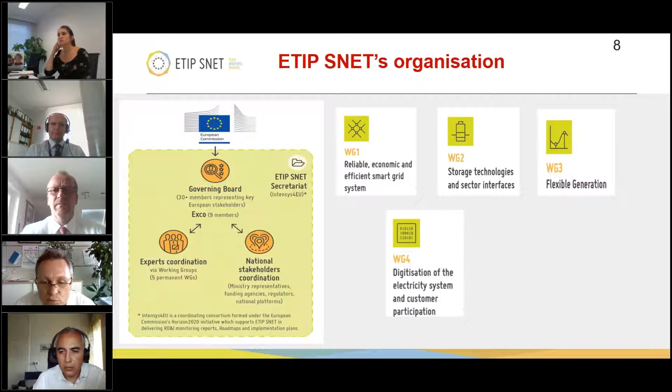So these are the 5 groups: dealing with storage technologies, dealing with the grid as such, dealing with flexible generation - this is our working group 3 - but last not least, also important, digitalization and how innovation is implemented in the business environment.

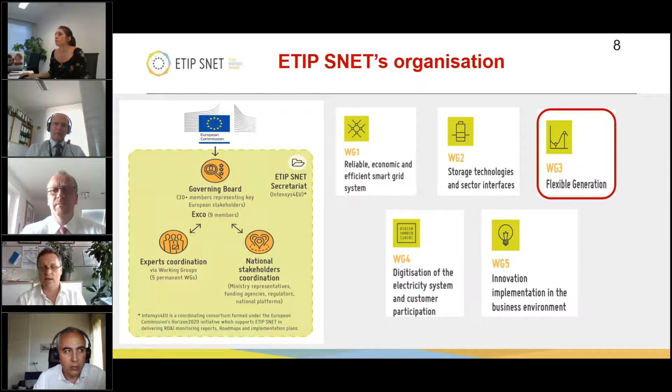So all today's speakers are members of the flexible generation group.

The basis of our work is written in a Vision 2050, which was established a few years ago and published in July 2018. You see also the download links here.

And recently, Working Group 3 published a white paper on how flexible power generation in a decarbonized Europe can work together with the whole system. Last not least, every 2 years the so-called implementation plan is updated, and recently the implementation plan 21 to 24 was published, where the specific research and innovation activities are listed and described.

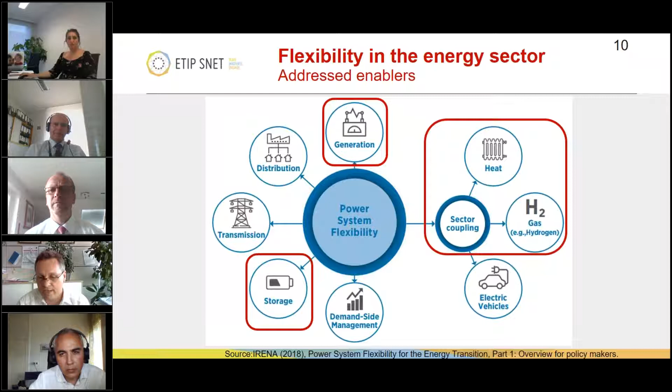Flexibilization of the energy sector. What does this mean? If you look on the power system only, it's quite clear that generation and the flexibility of the generation system plays a major role, but it's also about storage and what storage has to play in the system. And energy is not only about power, but sector coupling will more and more play a major role when it comes to power to heat, power to gas, and so on. We will hear about these issues also today.

So where are we today in Europe? Let's have a look on the world first, and we come now to electricity. If you have a look on the stated policy scenario of the IEA, this reflects the impact of the existing policy framework and also already announced policy intentions. There, in the global electricity generation mix, we find around one quarter renewables. This will increase to 37 and 44% by 2040. What does this mean? This stated policy scenario, and we are on this track today, is neither sustainable nor able to fulfill the Paris climate targets.

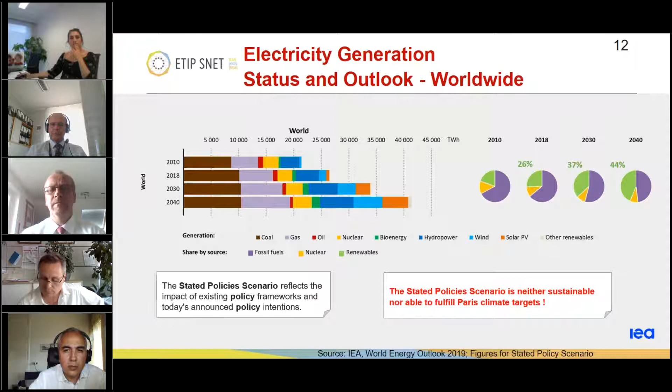So what about Europe? If you look on Europe, you find a different picture. First, you will see we have a higher share of renewables already. We had a decrease in electricity generation, which is good, meaning efficiency is increasing, but you see also by 2030 and 2040, electricity generation will increase. Why? We will hear about later. One third renewables, more than half renewables, and two thirds renewables by 2040. Looks nice, but even in Europe, this scenario would not be enough. We have to enhance and we have to speed up. This is not ambitious enough.

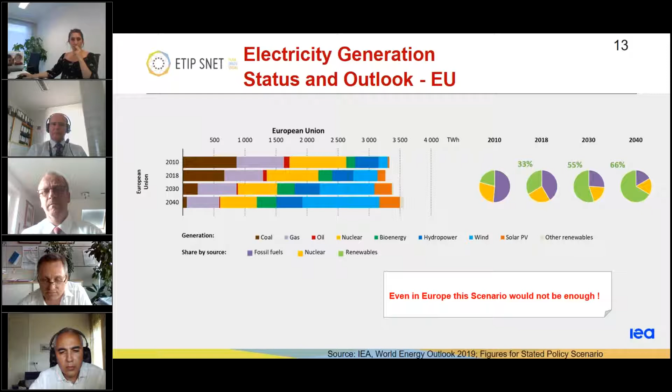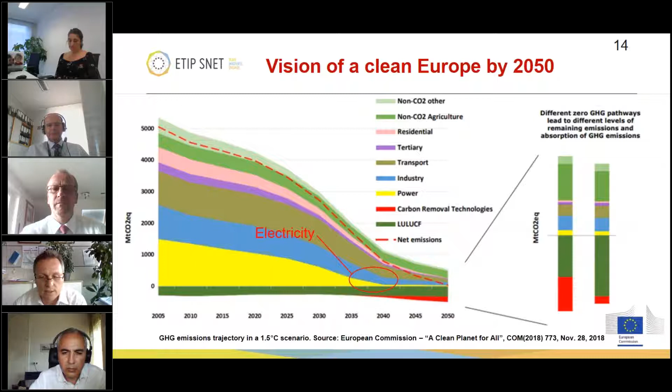So this was power, electricity only, but the target is to reduce the overall greenhouse gas emissions, the net emissions, to zero by 2050. Only the yellow is electricity. All the other reductions have to come from other sectors, and you find even negative emissions. These will come from carbon removal technologies, carbon capture and storage, carbon capture and utilization, and also, and this is the green, from land use change and forestry. These are carbon sinks.

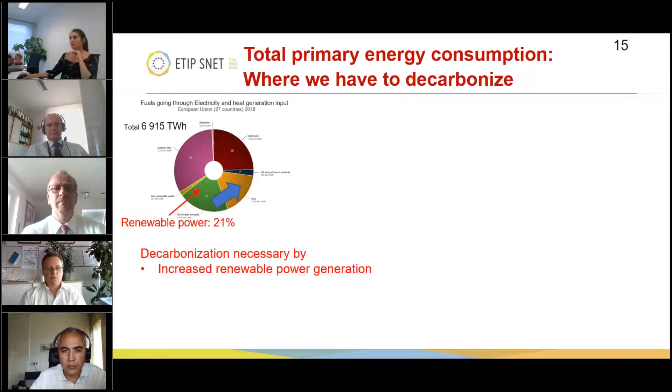Back to energy. Where do we have to decarbonize? If you look on today's electricity mix in the EU, you find around 21% only from renewables. Decarbonization means we need first an increase of renewables in the power generation mix. But if you look where the primary energy goes, you see also only 25% of the total energy consumption today is in form of electricity. And if you see transportation, even more than 90% is fossils. Also in the industry, half is from fossils. This means we need electrification. Therefore, in future in Europe, we will have more electricity generation than today. Society has to be electrified, and the fossil fuels have to be substituted by synthetic fuels, biofuels, hydrogen in all sectors. We will hear about this later on.

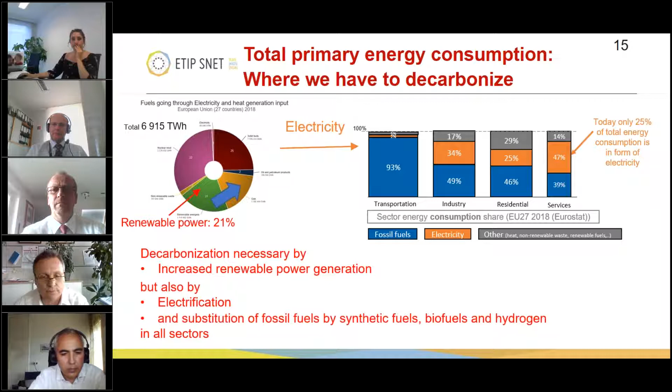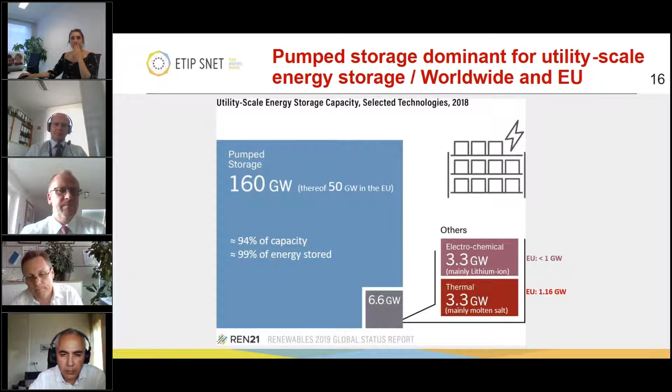So that's for the moment from my side. If there are any questions, we would try to answer them now. The one or other will be, of course, answered also later on. Thank you.

Yeah, so thank you, Peter. I see here a question: is the use of hydrogen in fuel cells also considered as electrification? It's done by Louise Gilles. So I'm not sure whether I got it. I got your question acoustically. Yes, the question is: the use of hydrogen in fuel cells, is that also considered as electrification?

No, first of all, the hydrogen has to be produced. I don't see the hydrogen in this case as a primary energy carrier, but perhaps you have other views on that, Georgios and Christian. We will hear, I think, later about hydrogen use, and for me it's a matter of definition if that is electrification, because the primary energy in future will be anyhow green electricity. That means the hydrogen produced and afterwards burned for electricity generation shall be seen as an intermediate energy carrier, but no more as a primary energy.

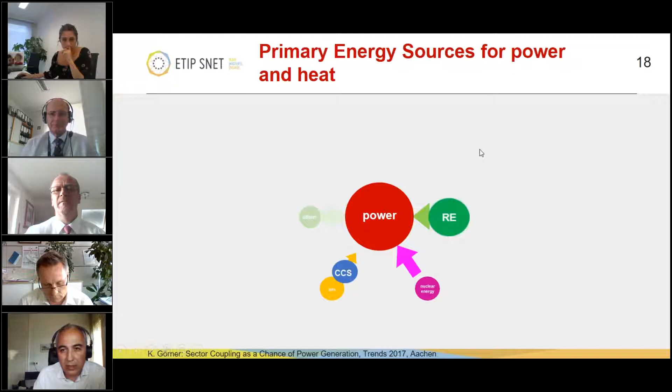Taking the floor from Peter who explained the current situation, we saw that, especially regarding electricity generation, the current situation in Europe is bound to change drastically. Everyone's talking about energy transition. Based on the evolving EU policy framework, we do expect first of all a gradual phase out of the coal power plants and a significant reduction in the shares of natural gas and nuclear energy. At the same time, of course, we expect a significant increase in renewable energy generation.

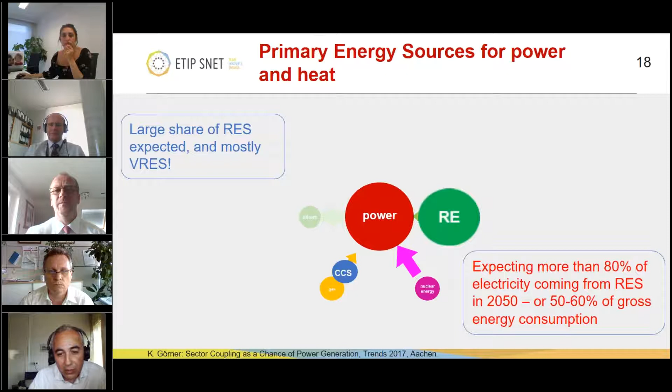This means that most probably we are talking about variable renewables, especially PV and wind energy. All the above are enhanced by the policy targets, both of the EU for 2030 and the long-term strategy for 2050 to become climate neutral or to have net zero emissions. And we do expect more than 80% of electricity coming from renewables in 2050.

Which are the primary energy sources for power and heat for the future? How will we cover the energy demand then? One obvious answer is that we can do that partly with the increased deployment of wind and PV generation, with high potential for large-scale deployment at terawatt scale of power. For example, notable examples are rooftop PVs and offshore wind energy. But again, at the same time, they are variable and intermittent, and we have even today difficulties to have accurate generation forecasts over time.

Then we expect biomass to play a role as well, with its main advantage being its excellent storability. But there are well-known issues about its limited resources.

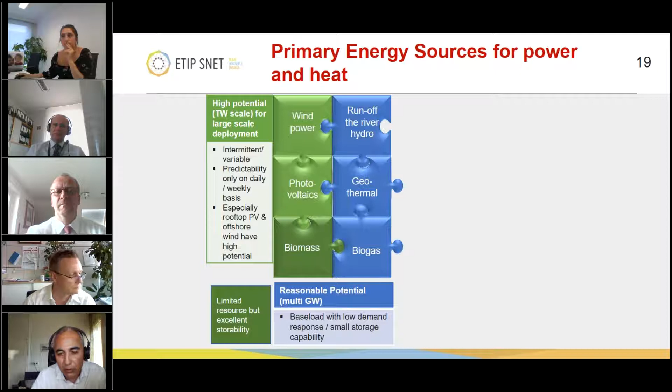Moving on with another category with significant generation potential in the scale of multiple gigawatts, in this category we have put run-of-river hydro plants, geothermal, and biogas plants. All these can cover part of the base load, but with limited storage capabilities.

On the other hand, if storage capability is considered, the main technologies or sources with reasonable potential - even up to terawatt hours of energy scale of generating energy - are hydro dams or reservoirs, pumped hydro, and solar thermal. These are the main technologies capable of providing storage capacities at very large scale, but they have geology and geography restrictions. This means it's not for everyone - it may be site-specific.

Then nuclear, and up to a point very limited coal and gas plants, will still be here, though especially nuclear power plants only in certain countries and significantly reduced. Finally, other technologies like wave or tidal power are again largely regional and not really mature yet, having to overcome also environmental restrictions, while waste-to-energy power generation must run continuously and also face some strict environmental permit procedures.

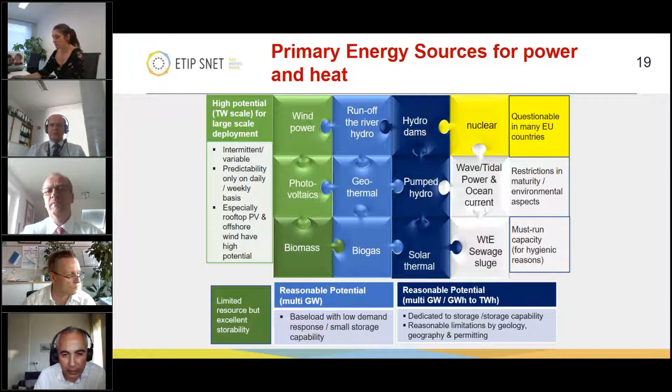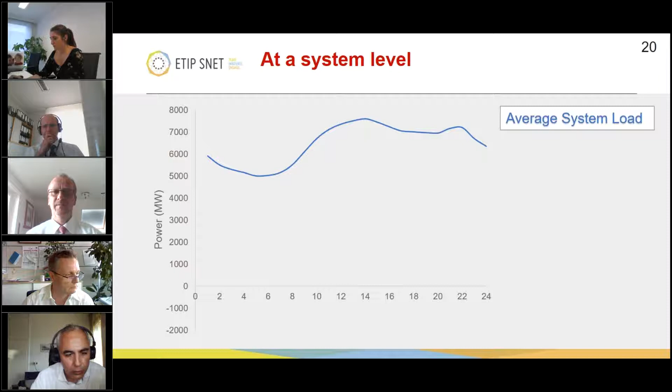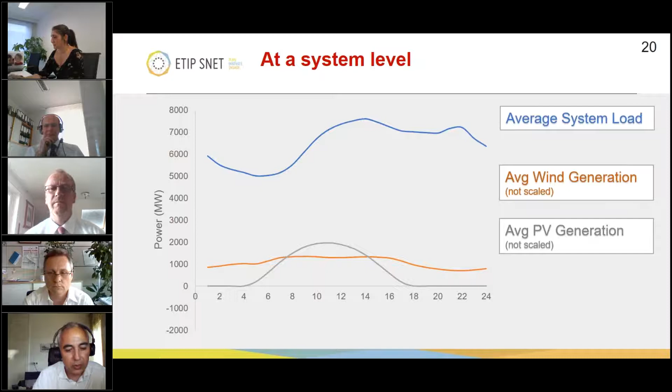Let's remember how a high percentage of variable renewables is changing the average system load of an electricity system. Taking the example of Greece, this is the average system load of last August 2019. If we subtract the average wind generation and average PV generation of that month from this load, it won't be so smooth across different days, but subtracting these two profiles from the average system load gives us the so-called residual load, which should be covered by other dispatchable generation plants, since PV and wind are not dispatchable by themselves.

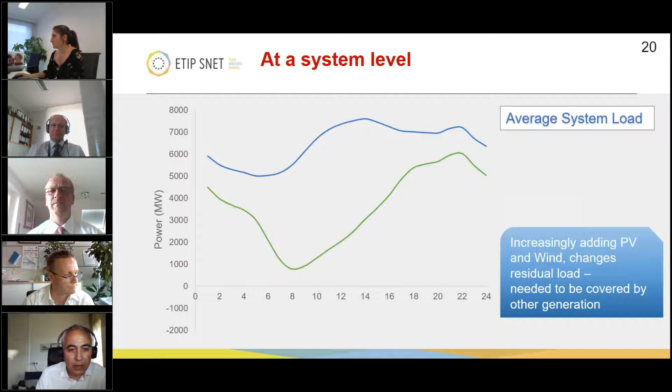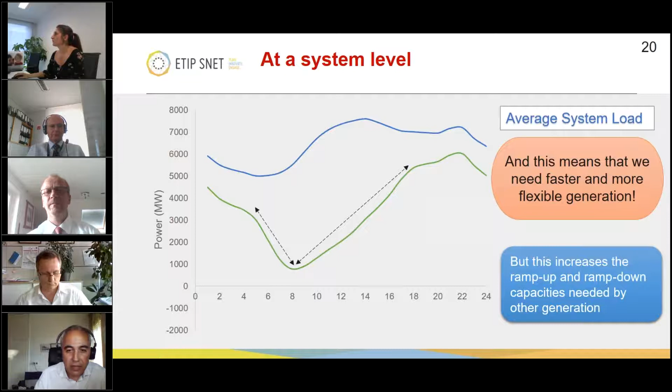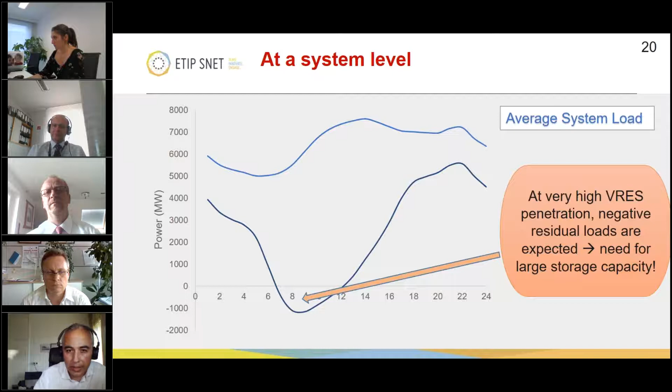Since we expect a very high increase of variable renewables, the profile of residual load needed from the rest of generation changes drastically. As we add more, the rest of generation needs to be taken on and off more rapidly, increasing needed ramp up and ramp down rates. At the same time, base load is considerably reduced, meaning must-run or non-flexible plants will be more difficult for the system operator to manage. Even at very high VRES penetration, we can expect negative residual loads, meaning we either curtail renewable generation or need large storage capacity. This is the well-known duck curve.

This brings us to a question largely related to our working group 3's field: what flexibility needs do we expect in Europe in the following period? The TSO Association in Europe, ENTSO-E, publishes a regular report called MAF, the Midterm Adequacy Forecast. They estimated the flexibility needs of European power systems in 2025 in terms of peak upward and downward ramps. This figure shows the hourly residual load ramps, meaning hourly changes in load minus variable renewable generation, requested from dispatchable generation units, considering each market node, or country, independently.

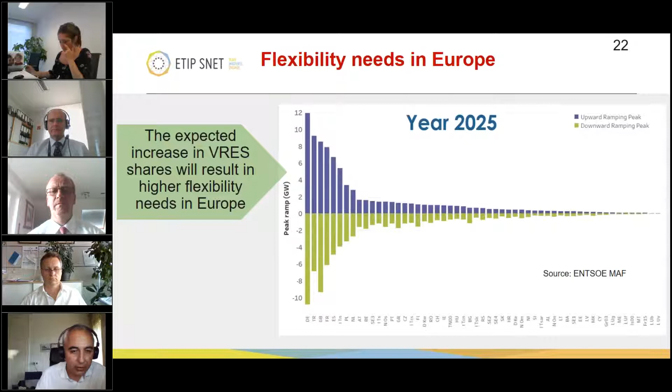Since we're discussing flexibility, it's important to clearly define two aspects. First, operational flexibility refers to the capability of a generation plant to support the system fast and reliably, hence the word operational. This is what is implied in the previous slide when we refer to flexibility.

Our working group's white paper discusses these concepts extensively, and we've found that over the last decade, operational flexibility has improved for both thermal and hydro plants. Minimum loading of generation has been reduced, as well as starting times, while ramping capabilities have increased. Operational flexibility also implies capability for black start, the process of restoring a generation plant to operation without relying on the external electric power network, to recover from a total or partial shutdown. The main challenges are material stress and wear due to cycling, and increasing efficiency, especially under partial load.

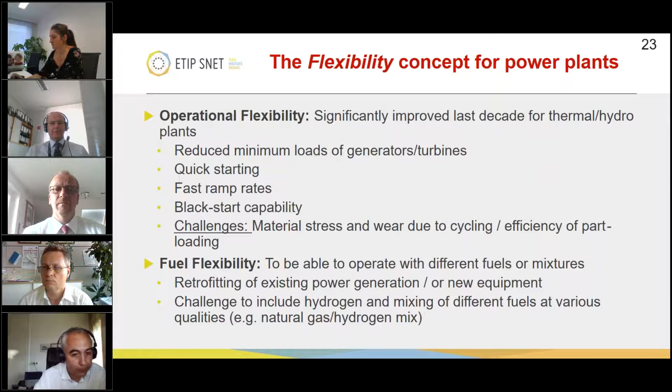We had a long discussion in our working group about the operational flexibility characteristics of power generation technologies, and we have come up with an adapted graph that you see here, categorizing several types of generation according to their flexibility characteristics.

This graph compares the main power generation technologies upon 3 flexibility characteristics: minimum load at the x-axis as percentage of full load, ramping rate capability in the y-axis, again as percentage of full load achieved per minute, and finally the hot startup time that is shown in the size of the bubble.

We can see, because there's a lot of information inside, that for example modern gas engine power plants operated especially in multi-units, possibly with fuel flexibility as well, have excellent flexibility characteristics, but again with relatively low efficiency, probably below 50%, while hydro, reservoir, and pump storage have very good flexibility characteristics with higher efficiency.

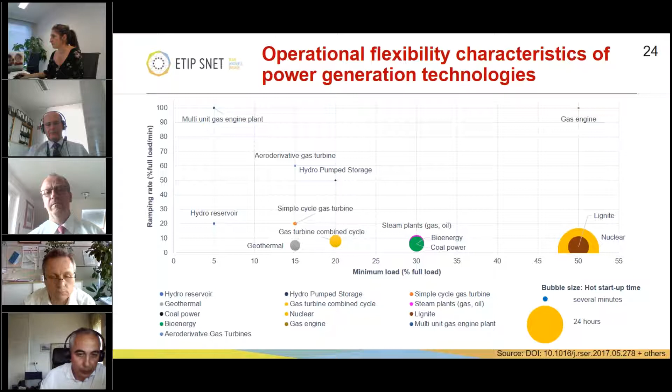In our recent white paper that you can download, you can find download links in the first slides of this presentation, we have evaluated in a qualitative manner the main energy sources with regard to their flexibility characteristics, both in terms of fuel flexibility and load or operational flexibility.

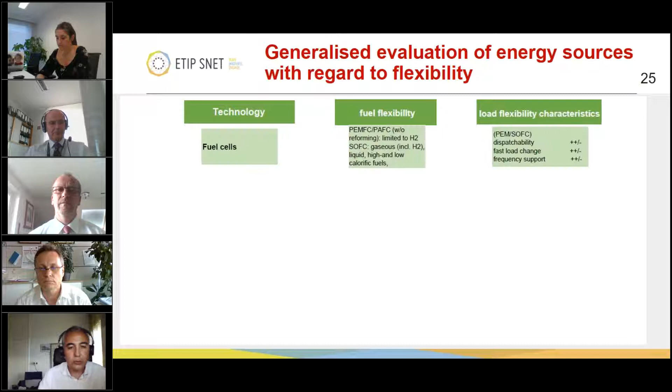Without going deep into details, you can see that, for example, regarding fuel cells, the PEM fuel cells have very good operational flexibility characteristics but limited fuel flexibility ones. On the other hand, SOFC have poor flexibility characteristics but higher fuel flexibility.

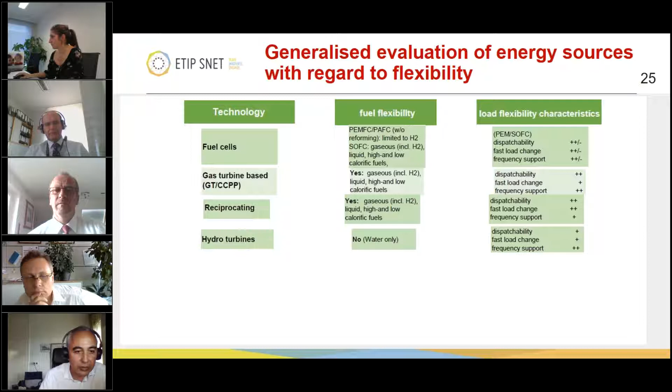Gas turbines and reciprocating engines both have good fuel and operational flexibility, while hydro turbines are characterized by good operational flexibility characteristics.

The thermal power plants can be fuel flexible, but in terms of load flexibility characteristics, they suffer, apart from the ability to provide frequency support.

Finally, as I said before, solar and wind energy are not flexible power sources, at least without being coupled with storage or other flexible generation units.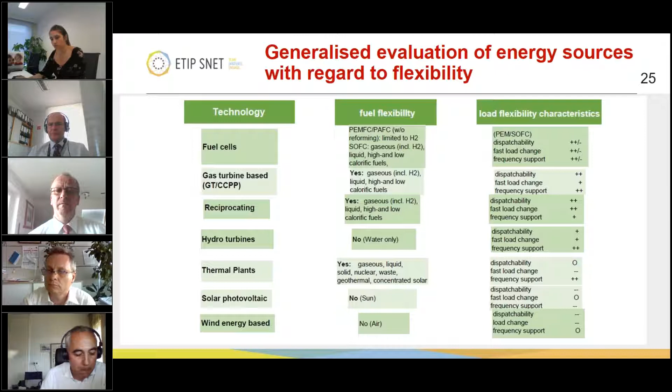This brings us to the connection with the next section that we are discussing about storage, and mainly I would say about long-term energy storage.

Apart from the fact that we do expect an increase in variable renewables, mainly PV and wind, we saw how this affects the system load and changes the residual load needed to be covered by other flexible generation. This situation is fueled as well by the fact that generally the produced power from wind and PV do not coincide with electricity demand. This is a well-known feature, but again plays an important role specifically for power systems.

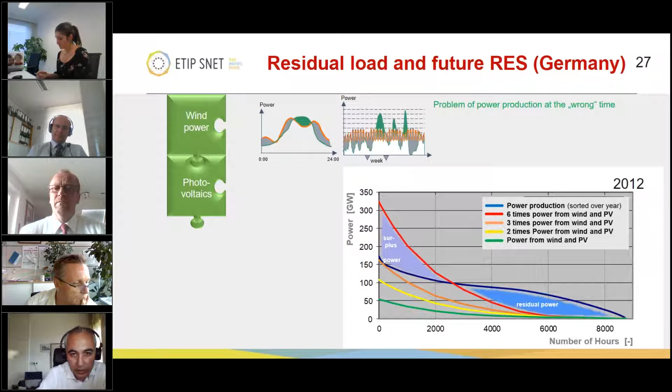On the other side, for another 5,000 to 6,000 hours of a year, we have a residual load that should be covered by flexible and dispatchable generation with characteristics like the one we saw before.

Now, if we can have, let's say, bulk energy storage options, we could potentially use it to shift part of the surplus power to cover the residual loads. This means that we need to think about how thousands of terawatt hours can be stored seasonally and then use it at a later stage when needed.

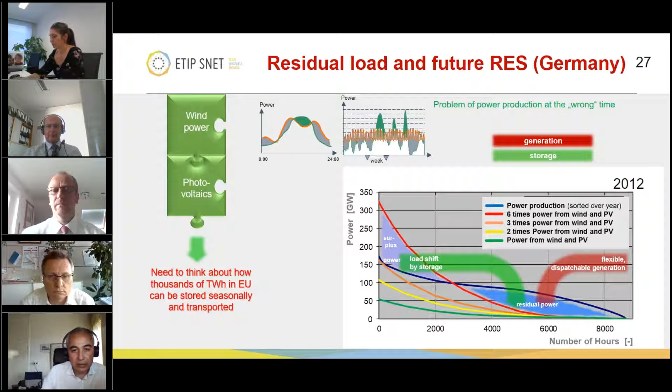Generally, storage can have multiple uses in a power system, and this depends on the power and energy capacities and the response time of each technology.

Storage can enhance the stability of the power system by providing high power outputs at short times. It can also smooth a variable renewable power generation profile during a day or parts of a day, providing the so-called capacity firming. On a daily basis, and providing sufficient energy capacity is available, storage can also help to shift loads at certain times of the day, filling valleys of the profile or reducing peaks.

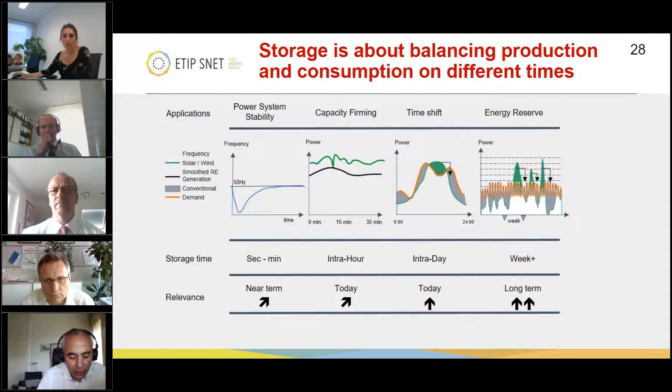As was explained previously, at long term, storage can act as an energy reserve, obviously as long as large storage capacities exist. We will not go deeper into the effects of storage into power systems, as this was dealt with by Working Group 2 and the webinar of last week.

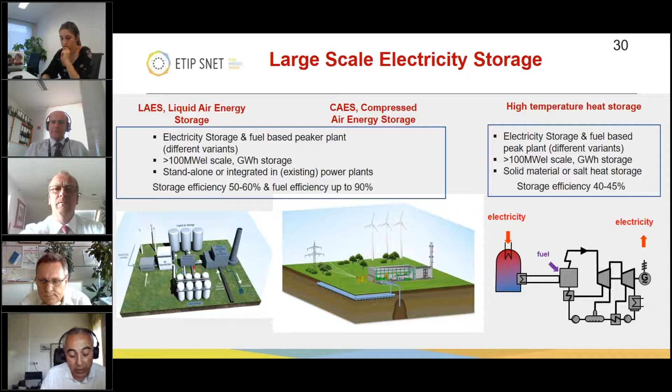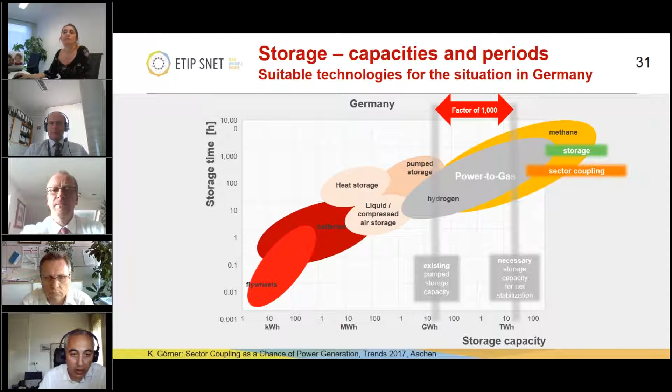So, for example, we could use the high amount of excess energy to produce fuels for the transport industry, to transform it into heat for the heat networks, into gas for the gas networks, and so on.

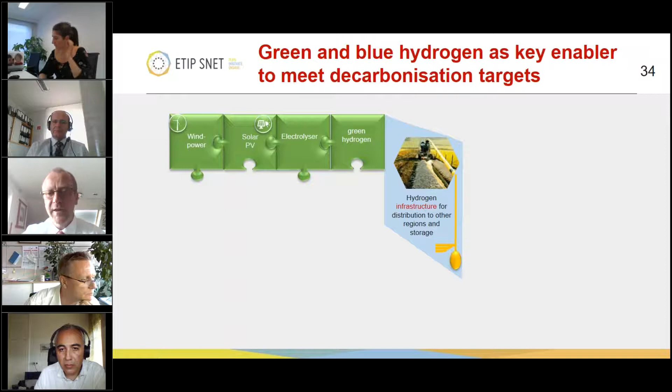And of course, with hydrogen, we also need the infrastructure. That means we need transportation, either mixing with natural gas or in future pure hydrogen pipelines, including storage in caverns. And if the hydrogen is distributed, we can use it either directly for fuel cell cars, trains, or in reconversion into power and heat. We can, of course, also go into more valuable synthetic fuels, which drive aviation or shipping.

And that's the last point. Once we have caverns available, which are no longer used for natural gas storage, then also hydrogen can be stored on a seasonal basis. Seasonal means something between 1 to 6 months at the end of the day, depending on...

We all know that the build of new PV and wind will take 1 decade, 2 decades more before all sectors can be supplied with green hydrogen. So there is also a transition technology, which is blue hydrogen - taking natural gas, reforming it, producing hydrogen, capturing the carbon, which we expect to play a role, at least in those countries which have a chance to store CO2.

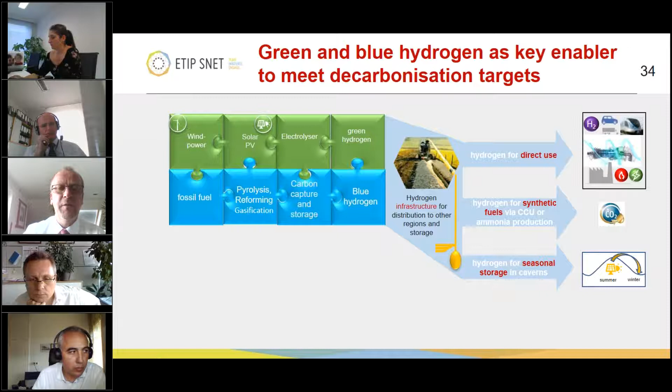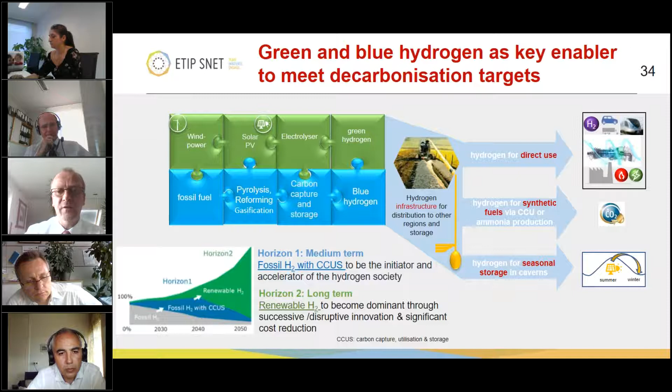That's mainly the North Sea countries like the Netherlands, UK, and Norway. And we expect that there will be a smooth transition depending on how fast renewables are added, how fast electrolyzer capacity can be built up - that in the beginning maybe bigger amounts of blue hydrogen are available, and that then after 2025, larger electrolyzer capacity driven by renewable electricity will serve these markets.

To go to the synthetic fuels, we have to consider also the need of carbon anyhow. If you want to go into synthetic kerosene for aviation or synthetic diesel or methanol for shipping, CO2 is needed. And also the chemical industry mostly relies on CO2. That means we need, if we go away from fossil natural gas or coal, recycled CO2 or biomass CO2 to produce chemicals and fuels.

In the UK and other places also, there is the idea to create negative emissions by capturing CO2 from biomass-fired power stations and storing the CO2, which will help other industries which have less chances to fully abate the use of fossil energies. And the technology itself, the capture and also the storage underground, is proven already in many regions in the world. What you see on the right-hand side is the world's largest carbon capture plant.

It is essentially a CO2 storage, but for enhanced oil recovery. So the CO2 is going underground, and on the other side of the well, more oil is recovered, but that doesn't matter. We see with 4,776 tons per day, the technology is mature enough.

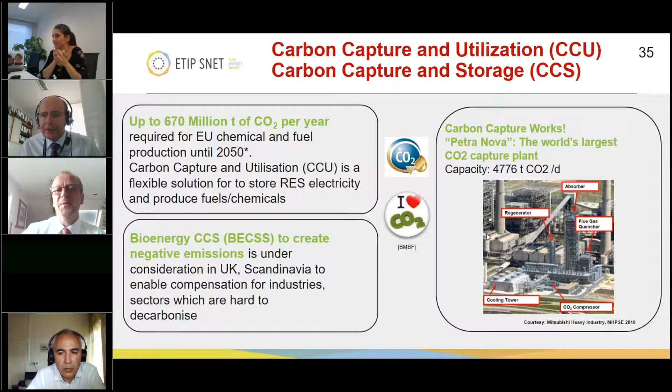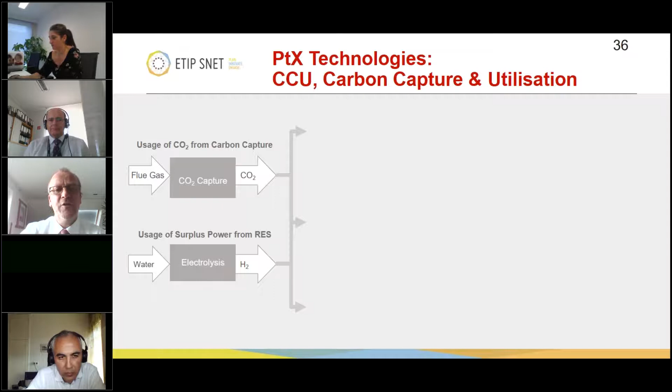So what uses do we consider, or does EU industry and research consider? On the one hand, of course, you always need the CO2 source and the hydrogen, and then you can go different pathways. One is the so-called power to gas. That's sometimes confusing because also people call power to hydrogen, power to gas.

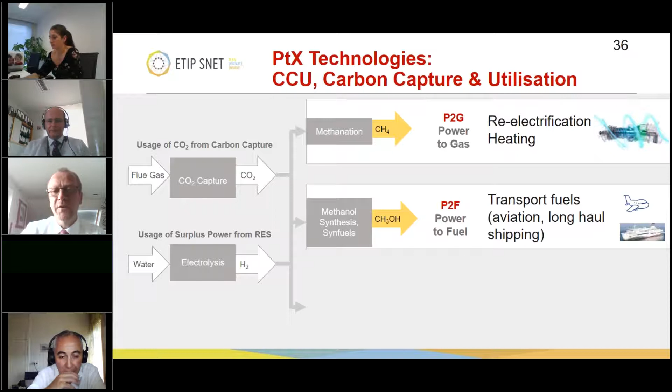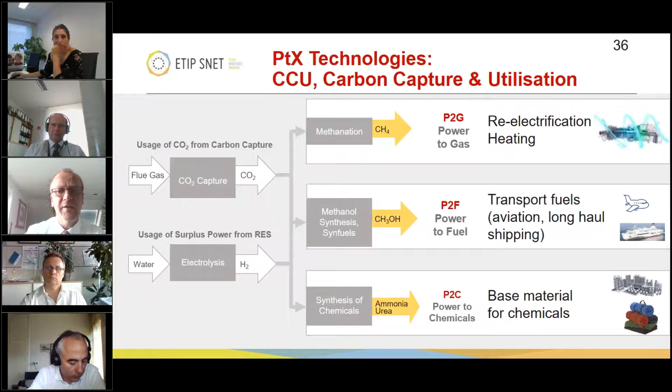Second thing is power to fuel, which can be in the beginning methanol, but from methanol you can go into diesel, kerosene, or other synthetic follow-up products of methanol. And then we have synthesis of chemicals like urea, where you first go to ammonia and you take CO2, and together you have then fertilizers produced, but also all plastics and so on can be produced based on hydrogen and CO2. It's just a different route of the chemical production line, starting with another form of CO2.

The technologies for reconversion of fuels, and it can be either hydrogen in future or today natural gas or liquid fuels, are well known. I just want to show the scales, what we are talking about at the moment. The largest fuel cells at the moment are in the megawatt range, but go down, of course, to the kilowatt range in cars. Gas engines are available to 10 megawatts, some 13 megawatt maximum size, and have efficiencies around 50%.

The combined cycle gas turbines, or gas turbine size, starts in the 1-2 digit megawatt scale, but they are mostly replaced nowadays by gas engines. But then these combined cycle plants go up to bigger than 800 megawatt electric and reach efficiencies there of 63%, maybe 65% in the next 5 years.

The fuel efficiency for all these technologies in combined heat and power units can be between 70 and 90%, depending on at what temperature level the heat is needed - so if it is high temperature heat for industry with steam, or if it is just a heating grid.

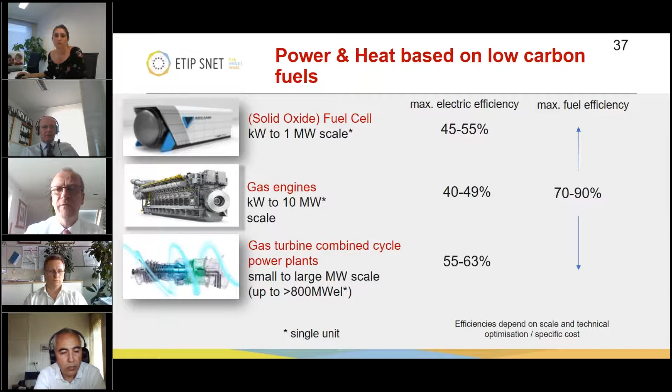Hydrogen is considered to replace all the fossil fuels used today in power generation, but also in power and heat applications in future. It can be directly burned in principle in gas engines, gas turbines, and fuel cells.

Ammonia, on the other hand, may be considered as a long distance transport molecule for the transport of hydrogen, for example from other regions of the world into Europe, because ammonia can be more easily liquefied than hydrogen. And the splitted ammonia, which is a mixture of hydrogen and nitrogen, can directly be burned in today's machines.

For the pure hydrogen combustion, another 5 to 10 years of development is needed, which is undertaken at the moment by industry. So about 30% can easily be co-combusted today, but for 100% combustion, this development time is needed to also keep all emission limits at the combustion, for example NOx in the combustion flue gas.

The first example of a hydrogen-fired turbine will be a retrofit, which is already on the way in the Netherlands, where Vattenfall announced with its partners Equinor and Gasunie to reduce CO2 emissions by 1.3 million tons per year in 2025, when an existing plant is retrofitted to 100% hydrogen combustion.

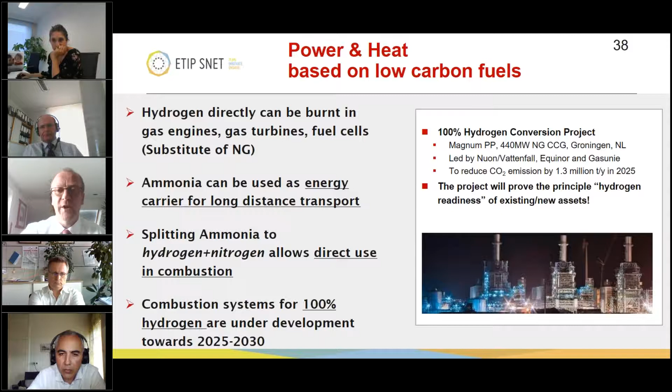But it's not only about hydrogen, and hydrogen is not the only solution. What is happening in the transition at the moment is that coal assets are replaced by new gas-fired investments.

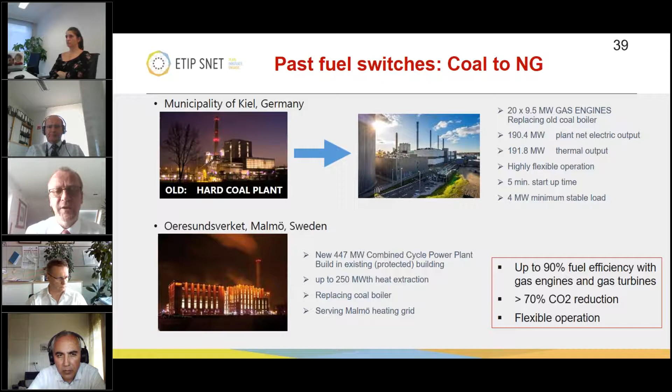As said before, these technologies offer 90% fuel efficiency, and when switching from hard coal to natural gas, also already 70% CO2 reduction, and quite flexible operation compared to the previous design.

But it's not only about flexible generation, because the CHP plants on the one hand are used to supply heat to heating grids. To make them more flexible, it's now state of the art to put gigawatt hour scale heat storage, like hot water storage, integrated in these power plants.

But the more renewables come into the electricity grid, the more the CHP plant also suffers from the inability to reach a reasonable income from the produced electricity. Therefore, more and more, especially in the German and Dutch context but also in UK, projects come up adding heat pumps and electric heating into such CHP plants to avoid the production of unwanted electricity in the heat supply. That means when there's a large excess of wind or PV power, then electric heating or large heat pumps will take over.

And heat pump technology at the moment is in the situation to make a big step into the 50 to 100 megawatt range. That means commercial scale industrial heat pumps being able to support both steam to industry, but also heat to heating grids.

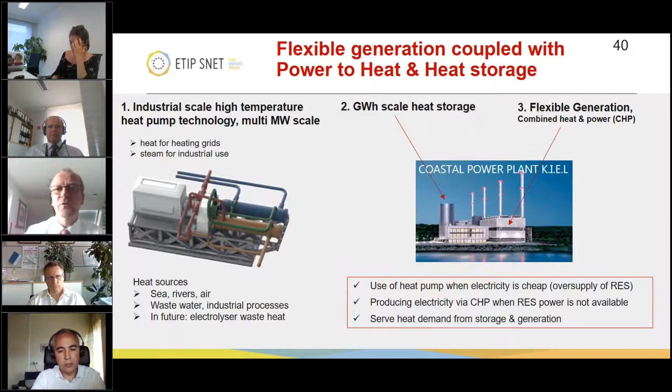In the past, retrofits already started 20 years ago to use existing coal-fired power plants, which are also mainly heating plants, like Avedøreværket in Copenhagen, converting from coal firing into biomass firing. The EU has just seen 3 gigawatt electric retrofits from coal-fired power plants into biomass firing over the last 20 years.

On the other hand, more and more every country in Europe looks at no longer having deposits for waste, but installing more and more waste incineration. Some countries are slow, but it's ongoing, and that is also somehow at least a low carbon source of energy, so better burning the waste than getting environmental problems from deposits. And at least 50% of this waste also is biomass.

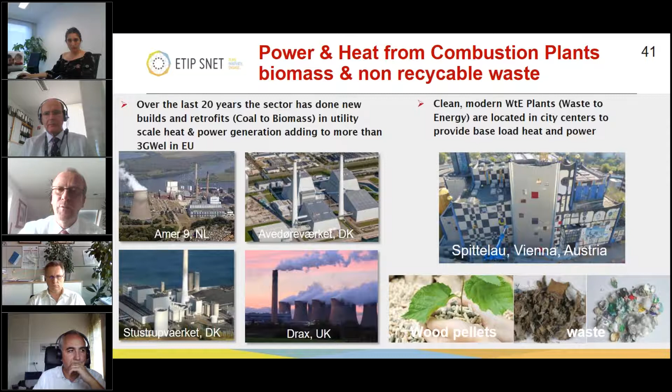And you see a protected building, an artist's design, being built in the middle of Vienna, because it is important, of course, for supporting the heat directly to the heating grids that these plants are not far outside of cities but in the middle. That also avoids long transportation of the waste.

So how can a decarbonized future look like?

The first thing ongoing today is optimization of all energy systems and implementation of energy efficiency technologies. It cannot be that we still have high temperature heat going through the stack in some industries at 400-500 degrees C. Organic Rankine cycle technology or other cycles for low temperature heat recovery are being implemented, but there's also a push needed from the policy side to support these projects which directly save CO2 emissions by using waste heat.

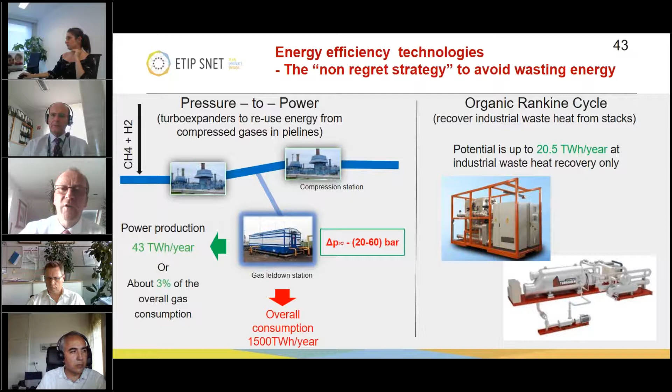One example is the gas grids in Europe, where often gas from high pressure—up to 200 bars, on average maybe 100 bars—is released to lower pressures without using the expansion energy. That means turbo expanders to use this compression energy in the gas grid should be implemented more and more. This is the low-hanging fruit and a no-regret strategy anyhow.

There is development of new thermodynamic cycles which allow more efficient cycles. That is, for my understanding, a 10-year exercise, to improve also the reliability and cost effectiveness of these technologies. You see on the right-hand side one example of such a pilot plant or small demonstration of a new cycle for using CO2 instead of water as the cycle medium.

We of course need to further improve the turbo machinery, not only for thermal power, but also for hydropower and wind turbines, because there's always efficiency which can be gained, and therefore it makes the whole value chain more competitive cost-wise. And we have to develop and further deploy new technologies to capture the untapped resources of energy.

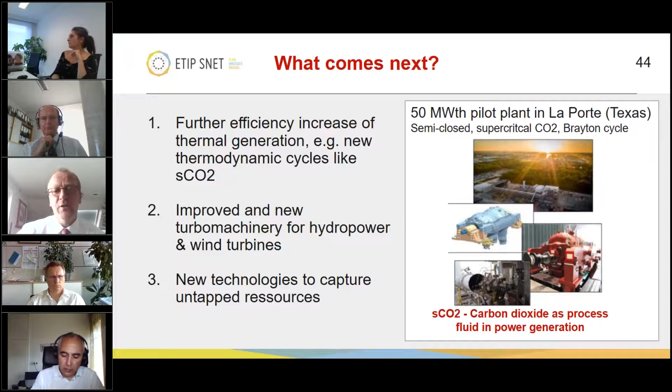That could be tidal range and current energy in the oceans, which of course have also counter effects when it comes to environment, and there more studies have to be performed on where and how these technologies can give maximum benefit without harming the environment. The same is true for wave energy devices, which either directly in the ocean or at the coast can extract wave energy, more or less also as base load.

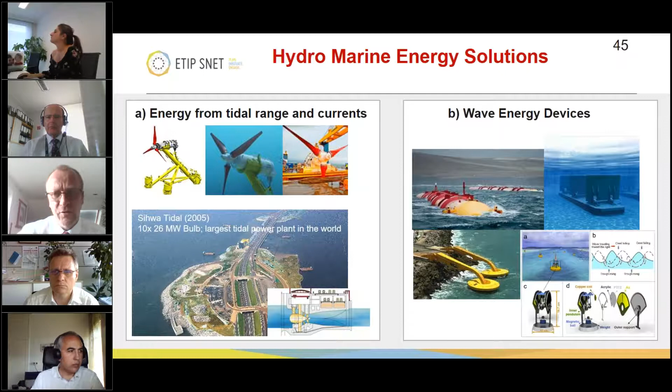Fully decarbonizing the energy system means that electrification is a core step, done at the moment and which will be further done with electric cars and battery storage, maybe at homes or in small businesses. Also, industry on a small scale can directly supply itself with wind and PV power. And of course heat pumps enable efficient use not only in homes but also in small and medium-sized industry.

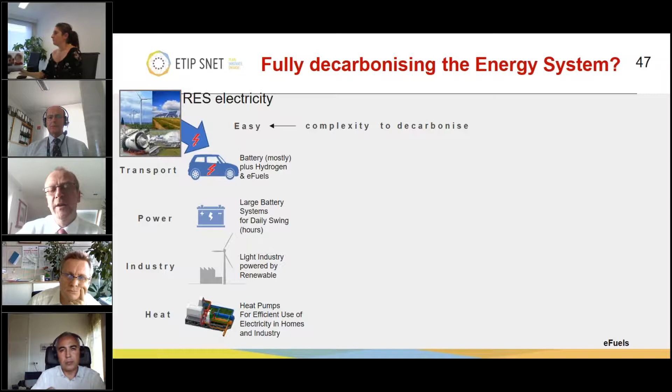Like pulp and paper industry, as one example, where a lot of energy is used for drying, but also waste heat is available to recover with a heat pump.

It will be much more complex to decarbonize heavy vehicle transport, shipping, and aviation. We will need synthetic fuels there, especially for big container ships and for long-range travel with planes. We will see more hydropower, maybe in some areas of Europe where resources are still there, but truly speaking, European hydropower is already very well explored, so this is maybe more something for other regions like Russia and Asia.

On the other hand, we have industry with high energy demand—steel making, cement, glass industries. These industries need fuel because they work at high temperatures, and this industry most probably will go into either synthetic fuels or hydrogen directly. The hydrogen route, wherever it can be applied, is the most efficient one. Whenever you go one step further into a synthetic fuel, of course, you lose efficiency.

But for planes, which was the one example, efficiency is not the issue. The issue is to have enough fuel on board, so you need the energy density which you have in liquid fuels. And then you see on the right-hand side, in addition to hydrogen, of course, biomass as one more piece of the puzzle.

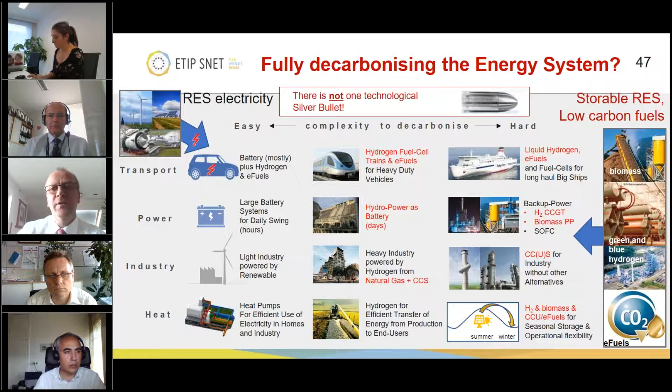On the bottom you see the seasonal storage again, which we need based on either synthetic fuels, hydrogen, and biomass. But at the end of the day, there is no single silver-bullet technology. We will need more of these technologies together to solve the problem.